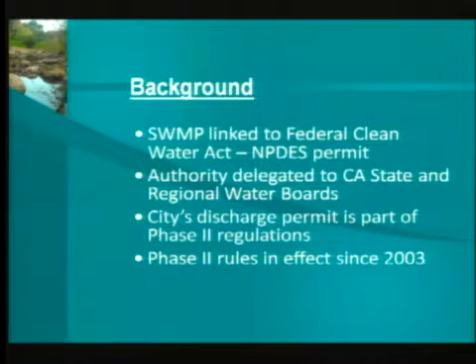So the NPDES program has two phases. There's Phase 1 and Phase 2. Phase 1 is larger communities like LA, and Phase 2 is generally municipalities that are under 100,000 people. The Phase 2 rules have been in effect since 2003, and the city has been implementing their stormwater management program since 2006. The Creeks Division provides the overall coordination of the program.

However, many employees are responsible for meeting the requirements. The Creeks Division does the reporting and making sure that city staff know what the deadlines are and what they're actually expected to do.

The current Phase 2 municipal code, or municipal general permit, was adopted in February of 2013, and this replaced our stormwater management program. So the issue was there were all these different stormwater management programs amongst the Phase 2 communities, and the general permit standardizes the requirements and makes them more similar.

So it's important to note that nothing in our old stormwater management program went away. All of the requirements are still in effect. We still have to meet all of the measurable goals. We just have new program structure, new reporting requirements, a new reporting system, and lots of new requirements.

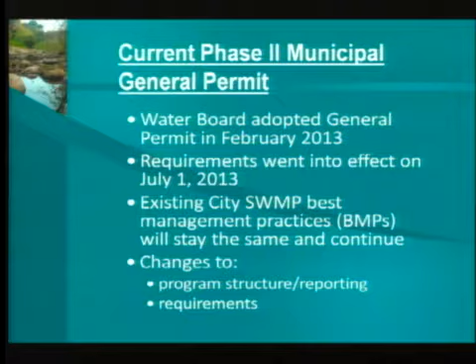All these requirements went into effect July 1st of 2013. It's a 5-year permit cycle for the new general permit. We're currently in year 2, which ends June 30th.

So with our old stormwater management program, it was basically a large text document, and the requirements were buried in this text document. We now have a guidance document with the general permit, and it's in a table format, an Excel spreadsheet, instead of this text format. And it's much easier to read and figure out what the requirements are.

It has a list of all the requirements, who's responsible for those requirements, whether the city is currently meeting those requirements, and if not, how the city's going to do that. And it also lists all the deadlines and when they have to be met.

We used to submit our annual report through email or through mail to the Regional Water Quality Control Board. Now we have an online system where we upload all of our required submittals. Our most recent annual report was submitted electronically for year 1 in October 2014.

There's lots of new requirements, and I'm just going to briefly go over some of the main categories. For outreach, we have a new community-based social marketing requirement, a partnership amongst the cities in Santa Barbara County, with the idea of having a coordinated message for outreach.

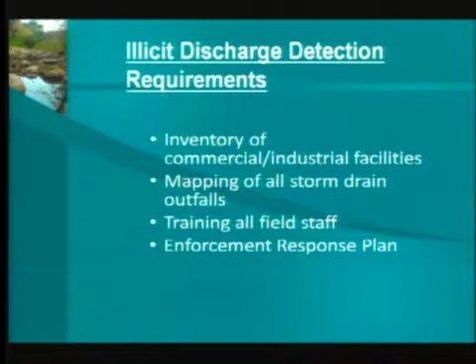For water quality sampling requirements, we have to do dry weather sampling of all of our outfalls. We have to wait 72 hours after it rains, then walk around to all of our outfalls in the creeks, and if any of them are flowing, we'll take samples. If any of the constituents we're sampling for exceed a certain threshold, we'll start an enforcement case and potentially figure out what's going on and how we can stop that.

We also have some increased monitoring of our 303D listed water bodies. If you don't know, these are a list of water bodies that the state compiles, water bodies that the state feels have excess pollution and not enough's being done to stop that. So we're going to be doing some bacteria monitoring, and for Mission Creek, some toxicity monitoring.

We also have a new requirement the permit calls a special study, where we get to choose a project to do more intense water quality sampling on. What we've chosen is to quantify the pollutant load for some of our capital projects. We've got some new permeable paver projects coming up that you might have heard about.

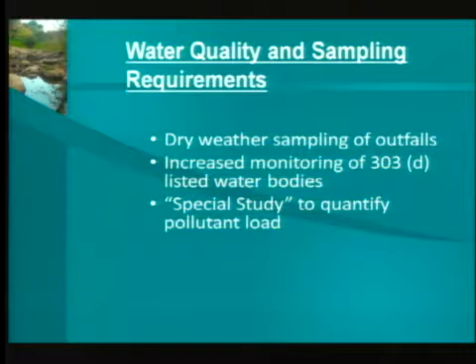The Alice Keck Memorial Garden, Veracruz, and Quarantina are going to get some permeable pavers. We've been doing sampling during storms to see what type of pollutants are flowing off of those pre-project, and then we'll know how much of a load reduction we get once the project's installed.

For new construction requirements, we have more staff training, mostly for staff doing inspections for construction projects that have erosion and sediment control plans, and also the building and safety staff that review those plans.

We're also required to have a QSD and a QSP on staff. The QSD is a qualified stormwater pollution plan developer, and the QSP is the qualified stormwater pollution plan practitioner. The QSD supervises the review of these erosion and sediment control plans, and the QSP supervises the inspections, so the building inspectors.

We're also required to have and maintain an inventory of all construction projects that have sediment and erosion control plans. We keep a running inventory of those, and we have to do inspections of those projects as well.

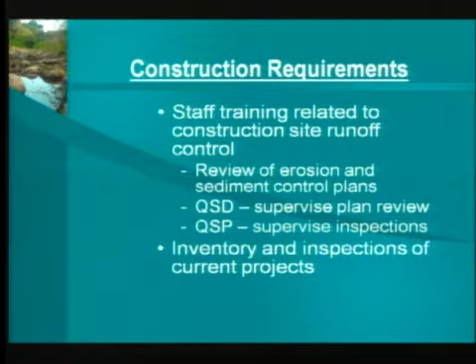There's also new post-construction requirements, and this is a strange term if you're not familiar with it. Construction projects that meet a certain trigger have to do structural best management practices, for example permeable pavers, bioswales, bioretention systems, or cisterns. These are systems that will treat the stormwater from hardscape before it flows off into the storm drain system.

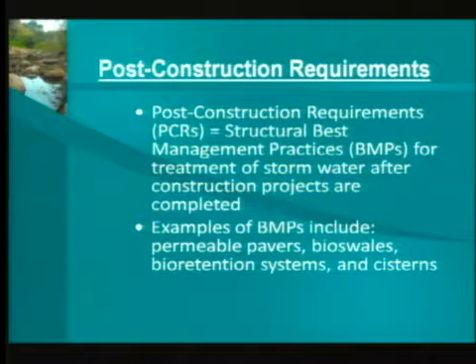I included a few examples of some of these best management practices to give you a better idea of what they entail. This is a permeable paver project, and the idea is that the water will flow down through those pavers and infiltrate. In this particular project, there's a cutout in the curb, so when the basin gets full, the stormwater will spill over into that basin for additional treatment in the vegetated area.

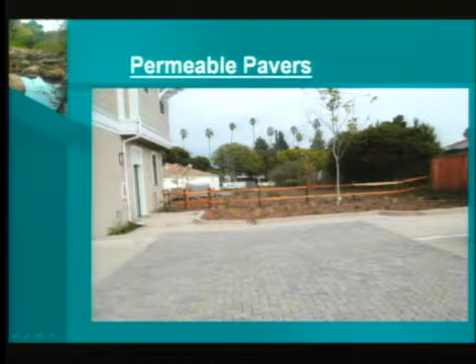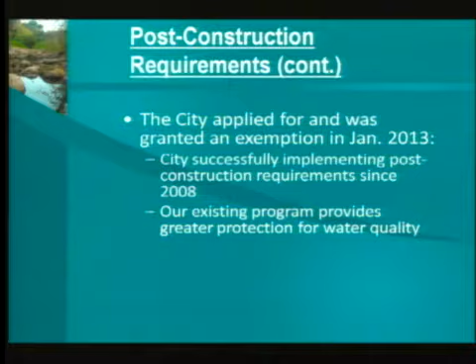So we do have new post-construction requirements. However, the city applied for an exemption, which was granted by the Water Board. We've been implementing a post-construction program since 2008, and the Water Board found that our existing program provided a greater water quality benefit than the regulations that were proposed.

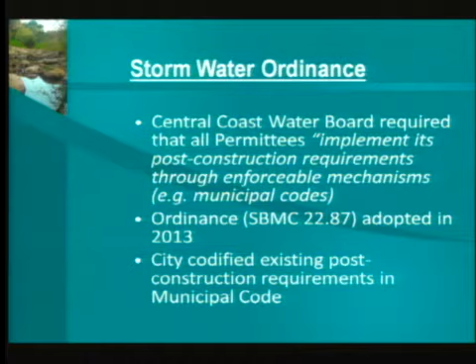One thing we did not get an exemption from was the regional board, or the general permit's requirement that we have a stormwater ordinance. This was something they wanted, to take our post-construction requirements and make them enforceable. So we adopted a stormwater municipal code in 2013, which essentially took our existing post-construction requirements and codified them into a municipal code.

Now that we have our stormwater ordinance in place, the next steps we need to complete - year 2 ends on June 30th, and we need to make sure all city staff are meeting those requirements as a city. Then on July 1st, year 3 begins and we'll start working on those requirements. October 15th of this year is when our second year annual report is due. And that's all I have - if you all have any questions, I'm happy to answer those.

Thanks, Jim. Yeah, very informative and complete. Any questions?

Madam Chair, the creek testing for bacterial and other pollutants - is that related to the contracts we sometimes give with Trish Holden and her associates, or is that different? This will be an addition to that.

This is for the 303D listed water bodies. Mission Creek is listed for bacteria and toxicity. We'll be doing testing for that water body, and then Arroyo Burro and Sycamore are listed for bacteria.

I know during the NBA playoffs, it's hard to ask someone to go out on a limb and make a prediction, but when we get to June 30th, then we have to assess whether all parts of the city have been doing their collective best to adhere to the municipal code in support of the SWIMP.

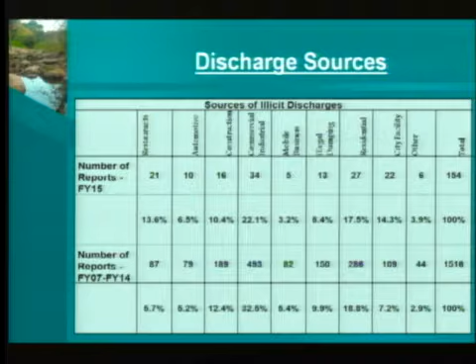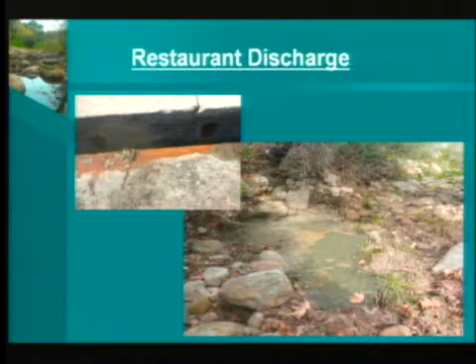I've got a few examples of some discharges from this year. The upper photo is a curb drain from a restaurant, and the discharge traveled down the street about two blocks into a catch basin inlet, which outfell into Mission Creek. That pool in Mission Creek is directly below the outfall. About 50 or 60 gallons of wash water made its way into the creek. We got that all cleaned out, which was good, and worked with the restaurant owner to try to prevent any future discharges. Hopefully that won't happen at that location anymore.

This was an air conditioning unit being repaired on a roof, and the workers had hosed the area without plugging up the roof drains, so it made its way out into the street. I was able to have them plug up the drains and capture their wash water before too much got out, which was fortunate.

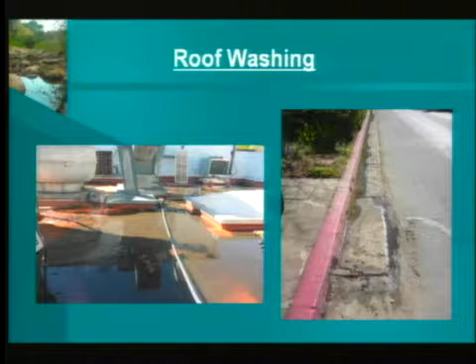Water main breaks continue to be a large source of sediment. Oftentimes it can take quite a while before workers are able to shut off the source of the water, and steps are taken early on to try to minimize the amount of sediment going out. But as you can see in this one, the best management practice of the filter fabric was just overwhelmed by the amount of water coming through. This was down in the Funk Zone area and required quite a bit of cleanup that took quite a bit of time. Public Works is actually currently replacing the entire section of the water line in that area to try to reduce the number of breaks there.

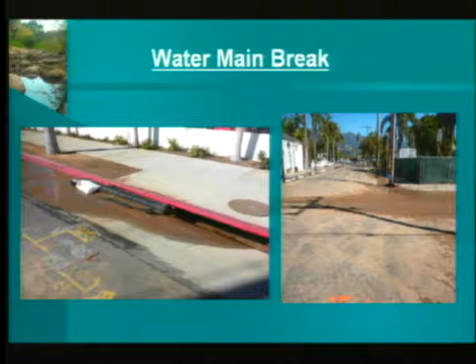Here we have a construction crew doing some core drilling over a bridge, down near Bohnett Park. As you can see, there's no protection of the drop inlet over the bridge, which drains directly into the creek underneath it — this is a section of Old Mission Creek. I contacted the construction workers and had them clean that area up and put in sandbags and other things to isolate the catch basin for the next day's work. They even called in and asked for advice on their next job site, so hopefully they'll have things prepared next time they're working.

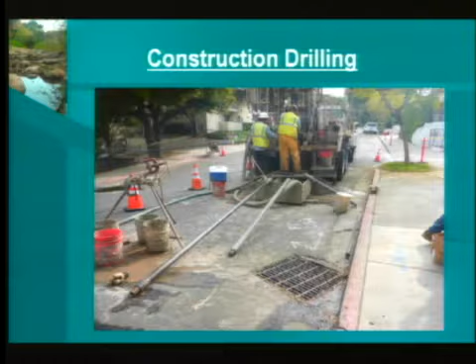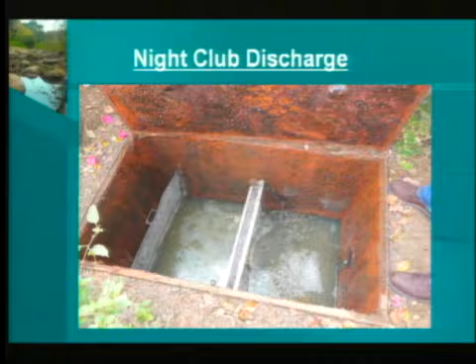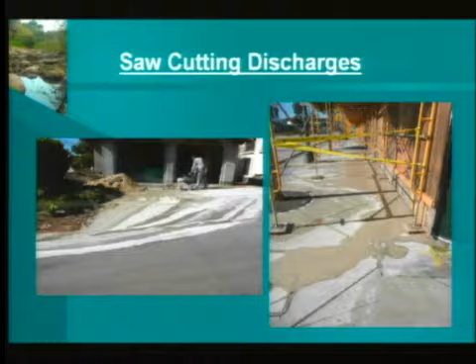A lot of times from construction projects, the issues tend to be sediment control or discharges from saw cutting operations. Workers often just don't think about where the concrete slurry is going. This tends to be pretty obvious to see, so we get a lot of reports on it and make sure it gets cleaned up, and hopefully it doesn't happen again.

Here's our enforcement data for the number of reported violations, notices of violation, and citations issued over the last few years. We're on track this year to have similar numbers to previous years, and again we continue to have a 100% response rate this year, which is what we'd been working towards over the last number of years.

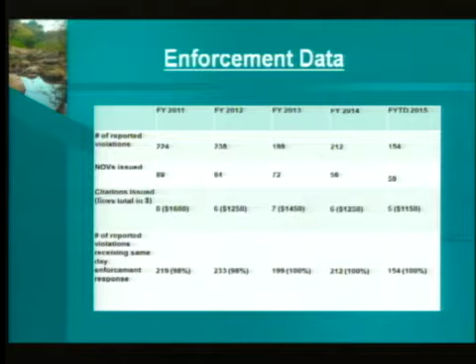Illegal dumping and encampment cleanup is another big portion of what I do. A lot of these come from enforcement calls and reports of pollution that come in to us, but a lot of these are found by city staff. Typically with these instances, it's difficult to enforce against because we rarely find the person responsible.

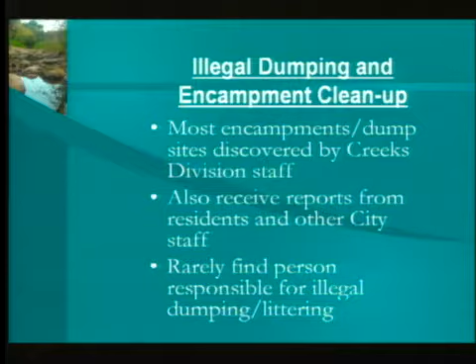A lot of the hot spots right now are in the Fish Passage area of Mission Creek. This is in the downtown corridor. It's a very popular location for transient encampments. It's very private, so there's been a lot of activity in that area.

Mesa Creek, which runs along Cliff Drive next to the Douglas Family Preserve and runs into Arroyo Burro Lagoon. This is a very difficult location to get to, and recently we found a very large number of encampments in the area.

Sycamore Creek near the railroad tracks, down near the waterfront by the zoo, continues to be a popular location. And Arroyo Burro, there's a concrete channel up near Hope Avenue that has some pretty permanent residents up there.

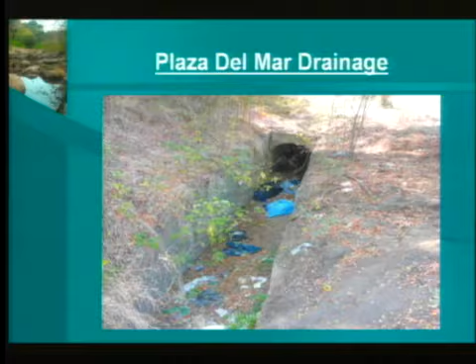So with the bathroom closed, they've turned to using this drainage channel as a bathroom and a trash can. So that gets cleaned up a lot. And this is one of the major waterways that actually empties directly out into the harbor. So getting this cleaned up is a big priority for us.

So city policy for encampments, we have to give a 48-hour notice before we can clean up an encampment. This gives occupants an opportunity to remove their valued possessions. And then after those 48 hours, a contractor comes through and cleans the area.

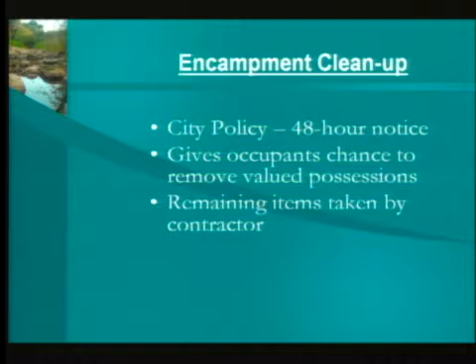Each cleanup site, the city's charged $104 by the contractor. So far this year, 723 sites have been cleaned for a total of 87,680 pounds of trash. Comes out to about 121 pounds per site.

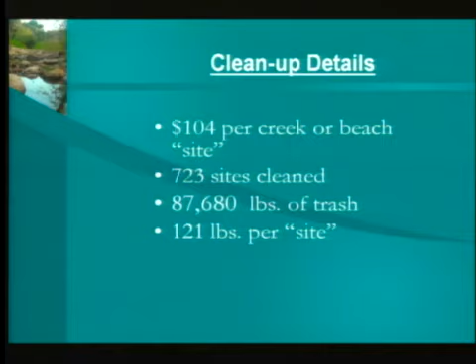And we're well on track to reach about 100,000 pounds this year, I'd estimate, by the end of the fiscal year.

Some of the major items found, a couple that kind of jump out at me, are the number of paint cans, and these include spray paint as well as larger paint containers. And then the plastic bags and feces are kind of the other big ones. We're hoping that the plastic bag ban may have an impact on that. A lot of that may also just be that people tend to store their items in trash bags, so that may continue to be a relatively high number.

And then typically with most sites, especially where people are living or provide a hidden location, we tend to have a lot of fecal incidents.

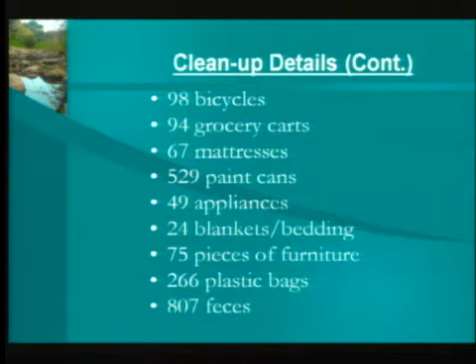And that's the end of my presentation. I'd be happy to answer any questions you might have.

In what percentage of cases, when you encounter somebody in the creek and return after 48 hours, are they still there? I would say a majority of them will at least leave most of the trash behind. Typically, they'll take their backpack with them but not bother to really clean up. Very rarely do people actually clean up after themselves in those cases.

They're still there when you go back? A small portion of them, the occupants will actually still be there. Usually they'll clear out before the crew gets there.

What do you do if the occupants are still there? If they're still there and try to interfere with the crew cleaning up, PD is contacted. If they don't get in the way, I'll usually try to talk to them and encourage them to move on to another location. And if it's someone I've talked to more than once, I'll have PD also get involved in those cases.

When you initially contact them, do you give them any information about where they can go? I encourage them to go to shelters or take advantage of other programs available in the city. I also refer them to a particular police unit called restorative court, which tries to help chronically homeless individuals get housing and deal with their legal issues. So I tend to refer them to that program in particular.